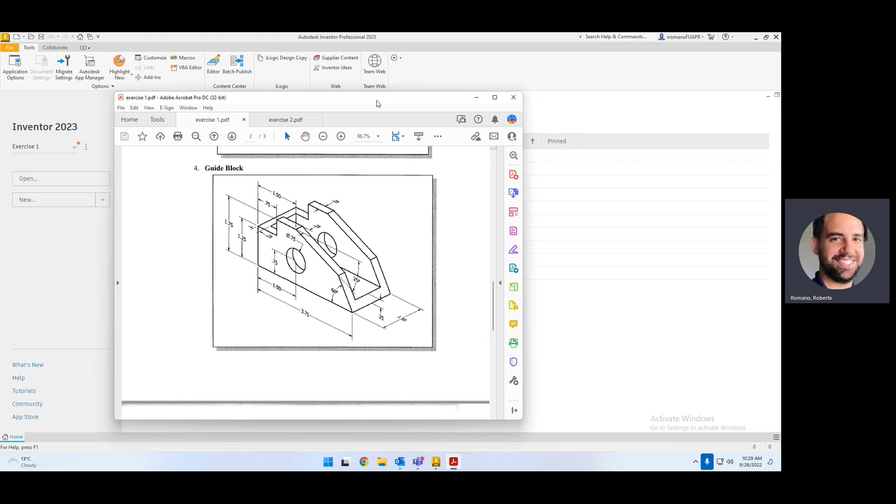So we're going to start a new file again in the same folder as before, create a new file, and make sure we're in the same unit. The unit should still be inches.

All right, start sketching—you can sketch how you want. I'm going to sketch it from, actually, we'll do the bottom plate first and then move upwards. So we're going to make a sketch. This time, instead of going from the XY, I'm going to start from the XZ view, so I have the top one.

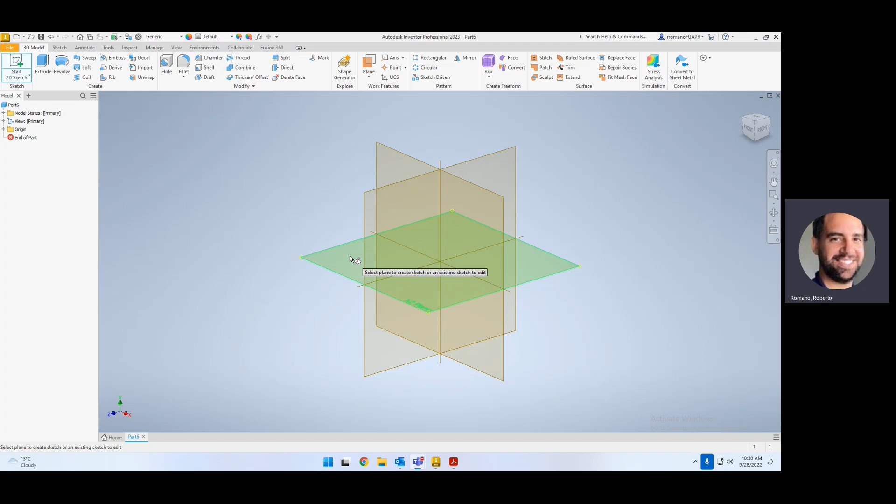I'm going to start off by making a rectangle. There are different options when making a rectangle: the 2-point, the 3-point, the center location, the center 2-point, the slots, and so forth. So what I'm going to use is the center one.

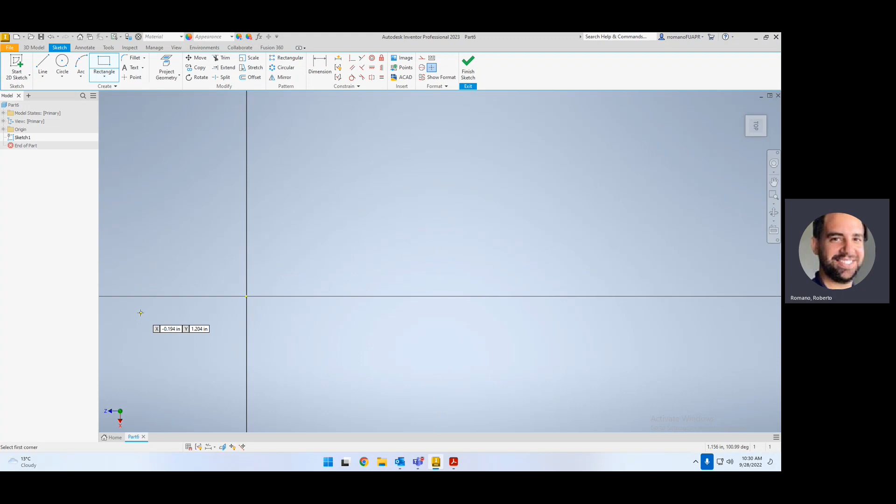This way I lock it in the origin. Or I could have—no, I won't do the center one. Let's do the basic 2-point one, and I'm going to go from this corner all the way to the next, just clicking and dragging my mouse.

Now looking at the PDF I gave you guys, it would be, for example, 1.5 by 3.75. This would give us the base for our piece. Just looking at this again, we do see we have the 1.5 and the 3.75.

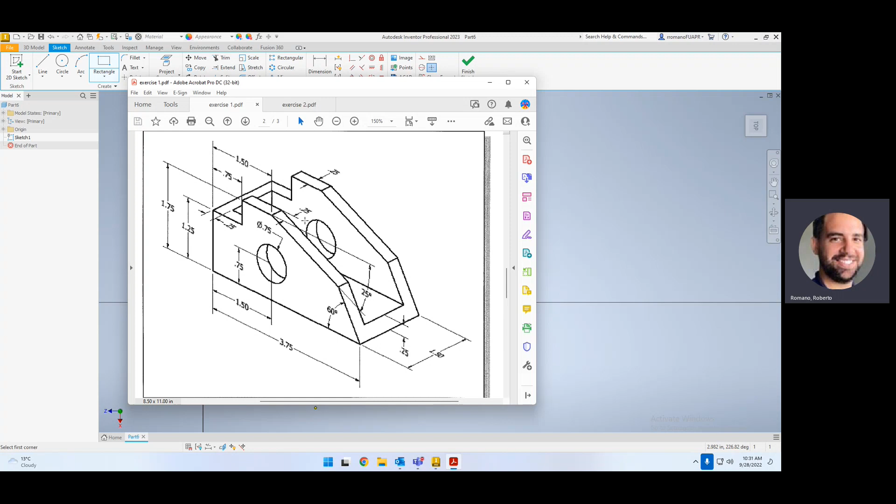Just take note that when you're looking at drawings like this, when they show dimensions in different planes, it means this one here would be the front view dimensions, and this would be the top view dimensions. If there's another view at the bottom, you'll have a different orientation as well. So just keep note of that.

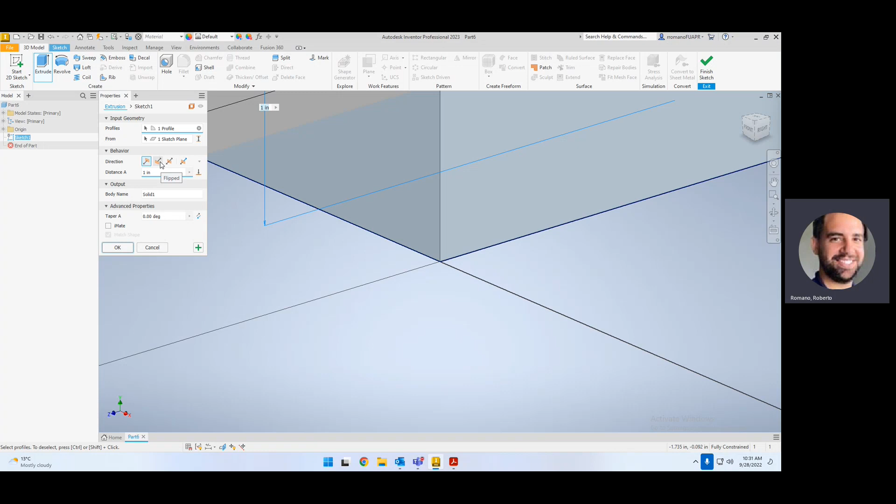So we have our first piece. Should I extrude it? Yes, we're going to extrude it. How much? 0.25. So I'm going to go to the 3D model, hit extrude, and go upward—actually, no, I'm going to go downward. Doesn't really make a difference up or down for this case. I'll type in 0.25, which gives us that thickness of the piece.

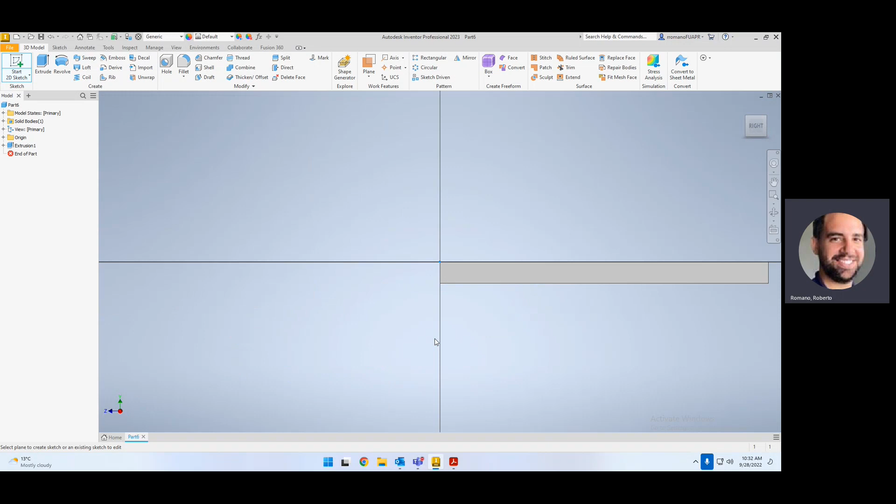Now we're going to start sketching from the side plane, so we'll do a sketch. You could have done the side sketch or the top—doesn't really make a difference. But if we want to sketch on this face here, we hit 2D sketch again, and this time I could open up the original origins, or click on the face I want to draw on. So I'll draw on this face, and it's going to properly align it for me.

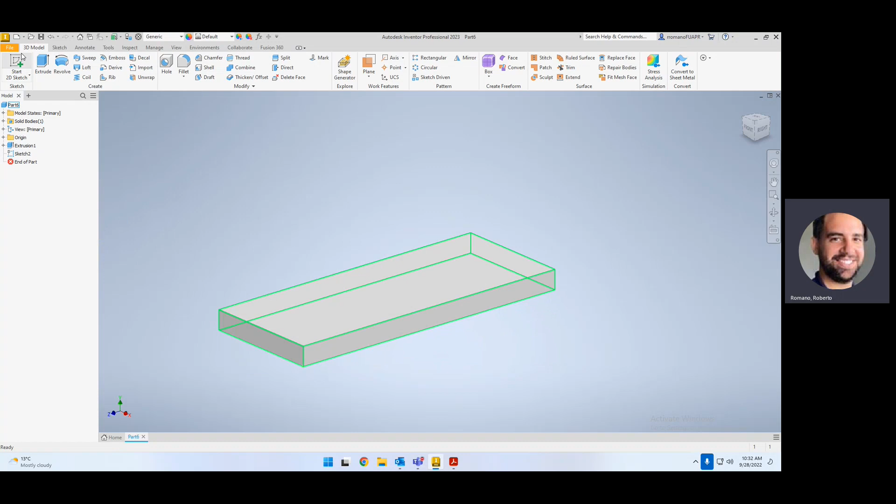If I wanted the point to be on the opposite side, so I have the origin in the corner, how can I fix that? Go back to the sketch, go back to edit extrusion, edit the feature by right clicking, and flip the direction so it goes up. So now if I do a sketch, edit sketch, you see I have the point going here. Why does it make a difference to me? It really doesn't—it's just that I have this point at the origin.

So when I cut the 60 degree angle, I'll have that nice clean result. Now I can start sketching my drawing. Did I really need to do the base first? No, but I wanted to show you that you guys can draw off that. So I could technically just go again from here—I already have the 3.75. Now I'm going to do the angle.

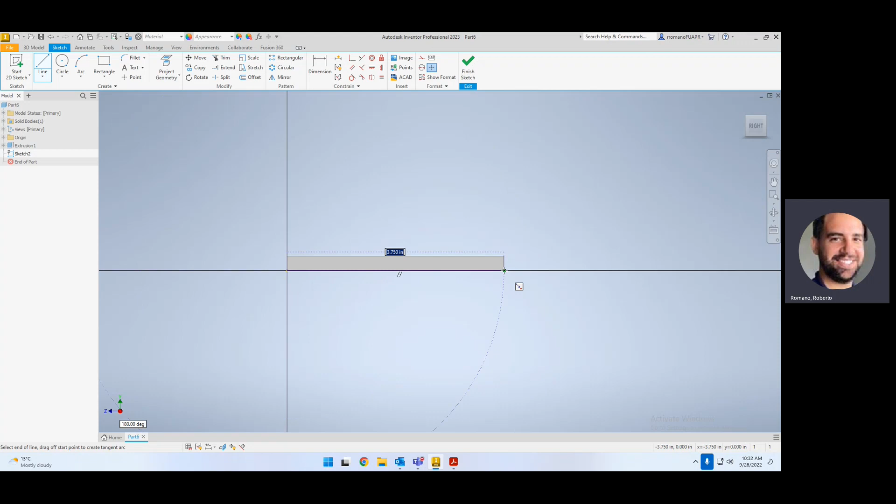So I know the angle is going to be at 60 degrees. For now, I'm going to go the opposite way first before starting the angle. Go from here, we go up—we see that it's 1.25. Go across 0.75, then we're going to go up again.

So it doesn't really give us 0.25. So if I don't want to put the dimension, what I'll do, like I showed you guys in the previous video, is I just draw a line, click it, go back, dimension it from this point to here, and put it back to 1.75.

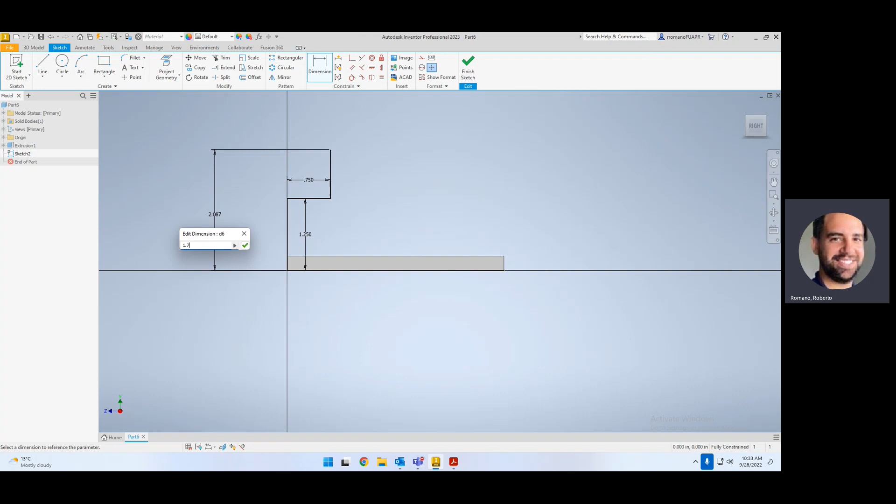Then I go across, draw another line like so, and I'll do the dimension from this point to this edge here of a total of 1.5.

And now I'm going to go down at an angle of 25. So you've got to just make sure that when you are doing it, that you have the angle you're working with.

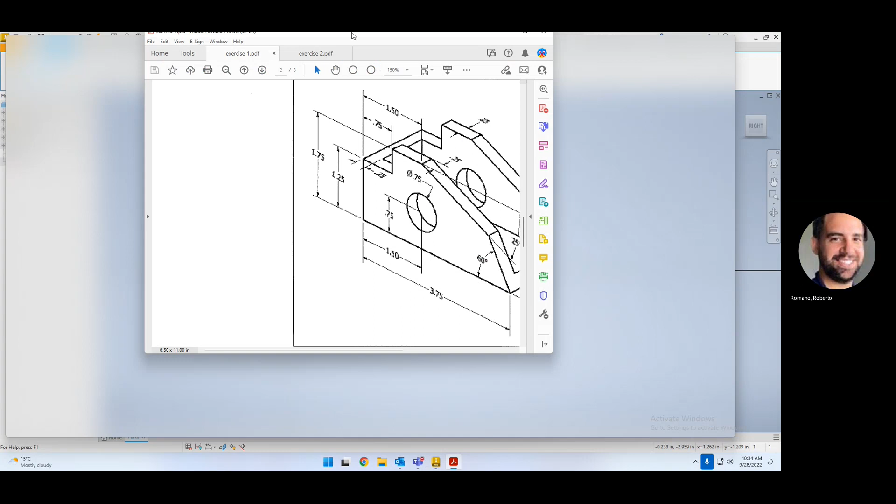So if we look at the drawing itself, we see that the angle going down is 25 degrees, and this one here is 60. So we're going to go back.

Again, if I just draw, press escape, get rid of this. So if I draw a line like so, and I click, you see that my angle is starting from 180. So if I'm going downward, it's going down. So what I would need to do is 180 minus the 60, which would give us a total of 120 angle. So I could type in tab 120.

That doesn't seem like the correct angle. So we're going to go back and just draw the line for now, and we'll go back to adjust it. So we go from here, and then there's another angle cutting through here. So now we have the shape.

Again, I didn't have to do this base. I did it just to show you could build off sketches. But we have the shape that we need.

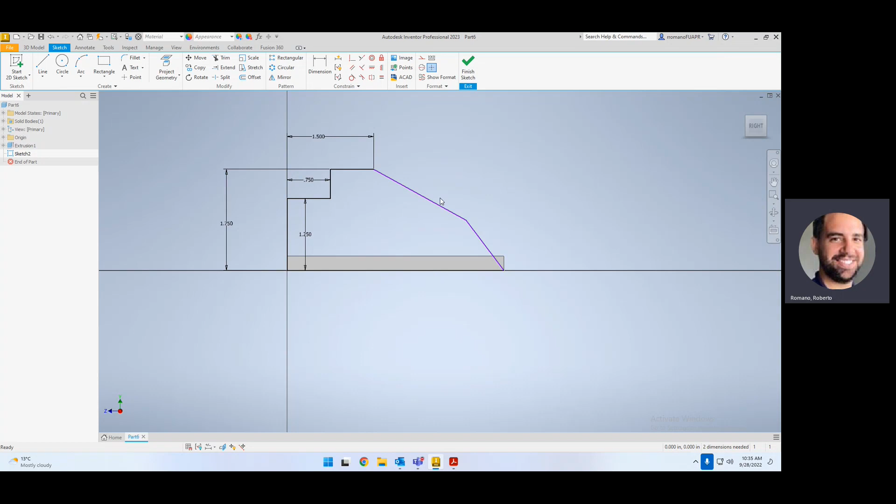What we can do now is start dimensioning to get the correct angle. So we know that the angle from here to here should be 60. We have that angle. And we know that the angle from this location to this, oops, not to that point—

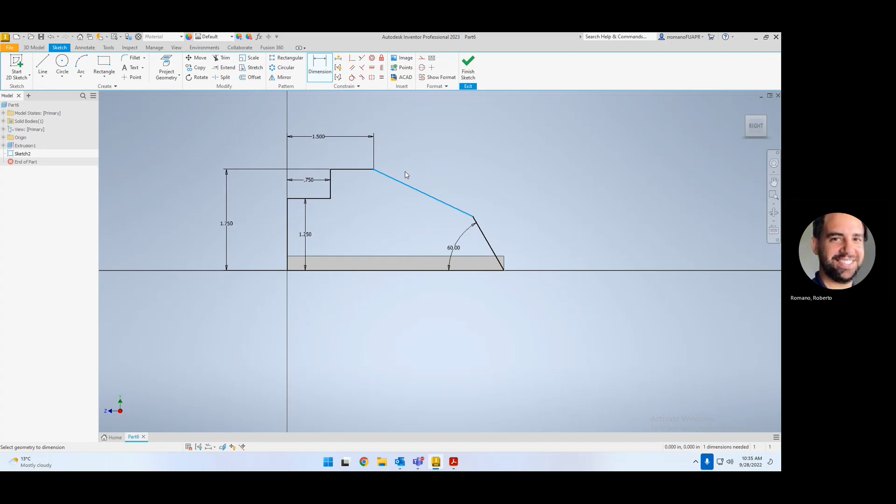from this location to this, come on, should be 25. Oh, that was pretty close. 25. And like that, we have our angle set up.

So what I just did is I drew a line, because these are the two dimensions that they give you just with the angle. They don't give us the length, so we don't need to have it. We have the angles, which is sufficient for us to do it.

Now that we have this profile, you see that I could cut this piece here. Did I need to start from the first sketch? No. The reason I did it, so we have the box, so you can show it. I should have not done it from the first one.

So what I'll do, and again, it's just educational anyway, is I will go back just to show you, and I will get rid of this guy here. And he's going to complain. So to get rid of the complaint that's going to happen, what I need to do is move this sketch here to a new plane.

So if I were to right click, you'll see I do have an option to redefine the plane that I'm working with. So I'm going to hit redefine. And what that does is it allows me to open up the origin, and I could choose a new plane where this drawing will move to.

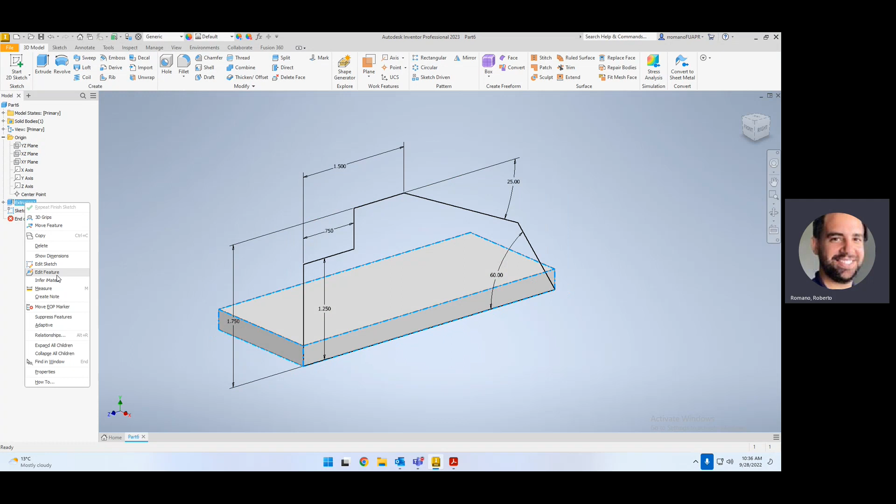What that does now, if I were to go delete this—the purple, I want to keep the purple. That's okay. Now I have my sketch. It should not affect anything because I did make it on its own plane.

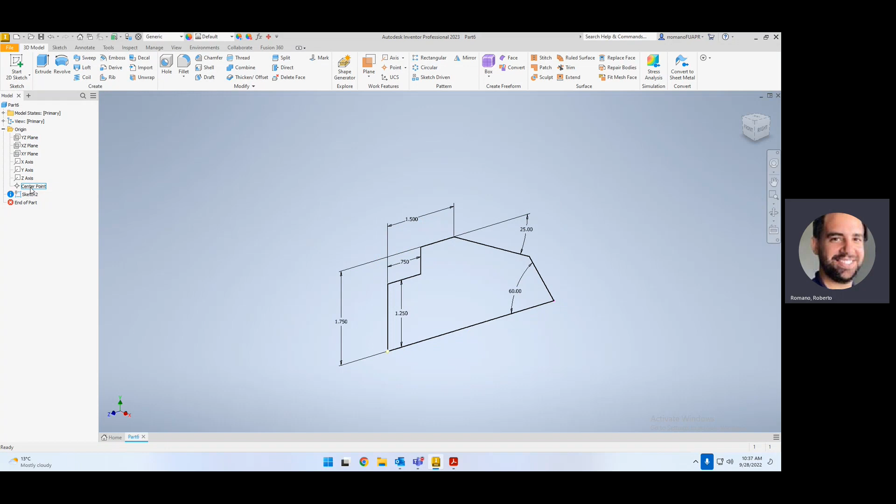Why is there an error here? Let's go check. Redefine again. You should be able to redefine on this one. What is my error? Let's go check the errors. Constraints. Okay, that's fine. Next.

So what it's saying is it's complaining about this one line here that I did earlier. If I just erase it and re-add a line.

So what happened is now everything turned purple. So what does that mean? If I were to go move the drawing, let's go move it. Oh, it's locked. So what's missing here?

Oh, I'm missing my angle I got rid of. Okay, so let's go back and draw the line again like we had before, from here to here. There we go. And all we're missing is our dimension of 60 from here to here.

And we are missing our center point. So how do we get back a center point? It's quite simple. You're going to go now to project geometry right here, and you're going to check the button that says project geometry right over here.

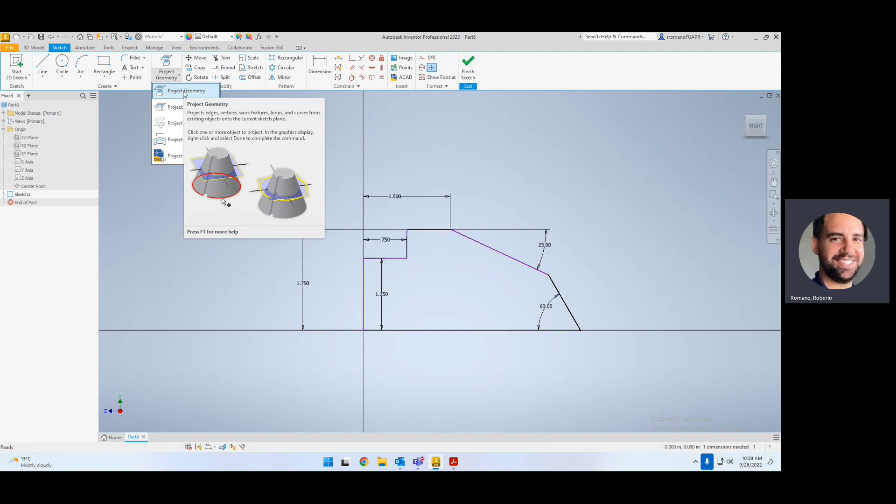I'm going to—no, not this one, sorry. Where is it? Is it under 3D model again? So it's under 3D model, sorry. And then you, hold on, let me just see something. Something went wrong here. Finish. Something went wrong. Let me go back here.

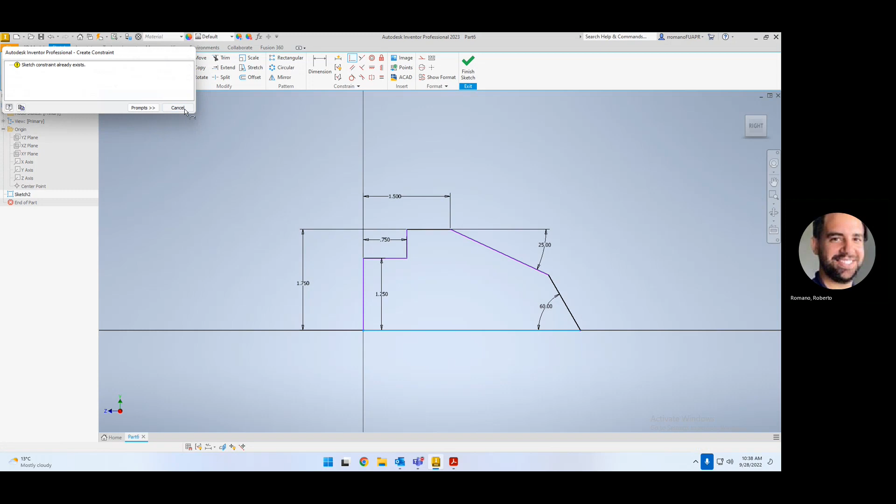Where is my point? Did I get rid of the point? Yeah, I got rid of—no, it's right there. So let's just see if I were to click this and this. Let's see what's wrong with it. Why is it stuck? Let's see if I can move this.

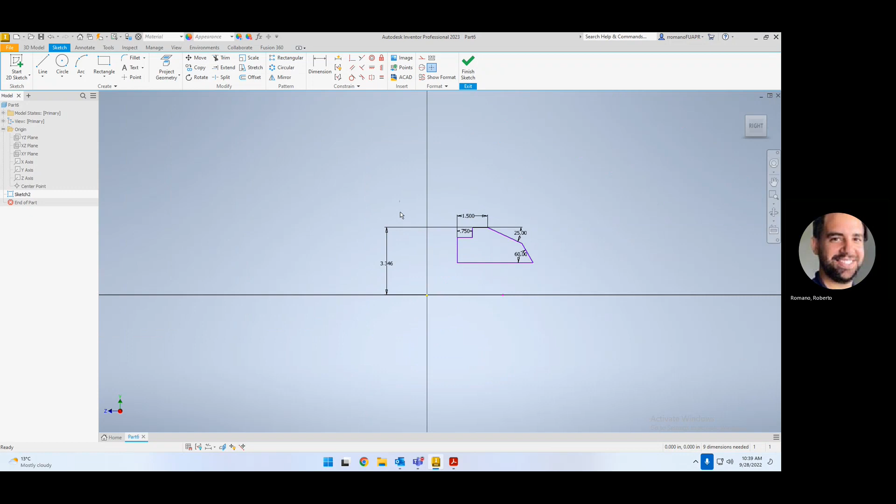So we're going to move this like this out of the way. I'm going to get rid of this dimension here for now. Get rid of this dimension. And so now we have our drawing. So there's this point here. See, there's a little dot that was in the way. That's where our issue was happening.

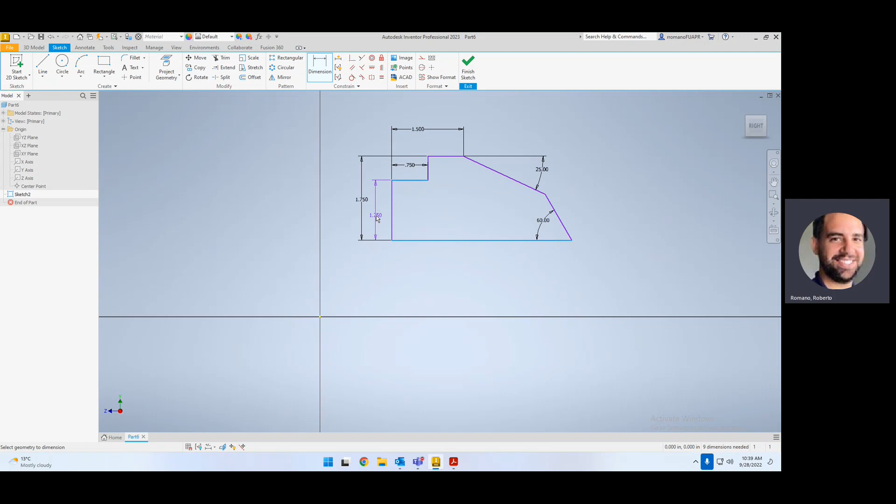Now, by getting rid of that dot, let's go add the missing dimensions before I do that. From here to here should be 1.75. So 1.75, there we go. No, I'm missing this one as well. From here to here, 1.25, that's correct. I have the 0.75, I have the 1.5.

The circle for now, we're going to add in a second. And I'm just missing my overall 3.75. I have my angle, I have my other angle. All I'm missing is, again, to lock this to the center. I'm going to use this constraint right over here and go to the origin and click on the point right over here. And it's going to fully constrain. So again, this is our goal for these assignments, is to make them fully constrained. Again, at the bottom right corner, it tells you.

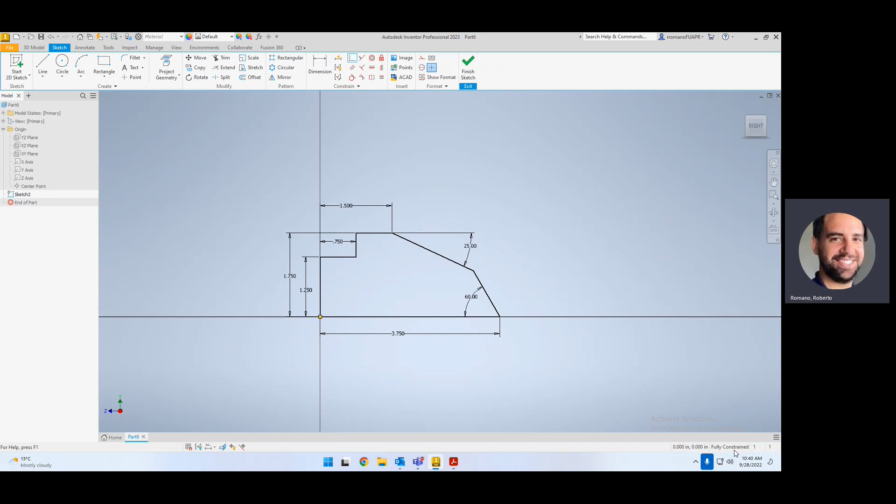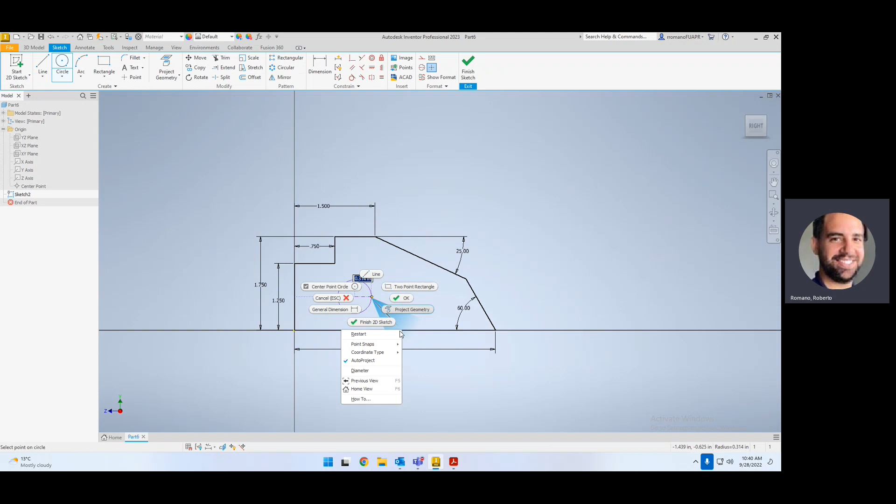Now that I have it fully constrained, all I'm missing is the circle, which I could add at the end, or I could add it now. I might as well add it now since it's here. Center circle. It is a diameter, so I click anywhere for now. If it's a radius, I choose radius. If it's diameter, I choose diameter. So it's been keeping the last one I set it to. So if I put 0.75, I do have my diameter now. All I'm missing is the placement of it.

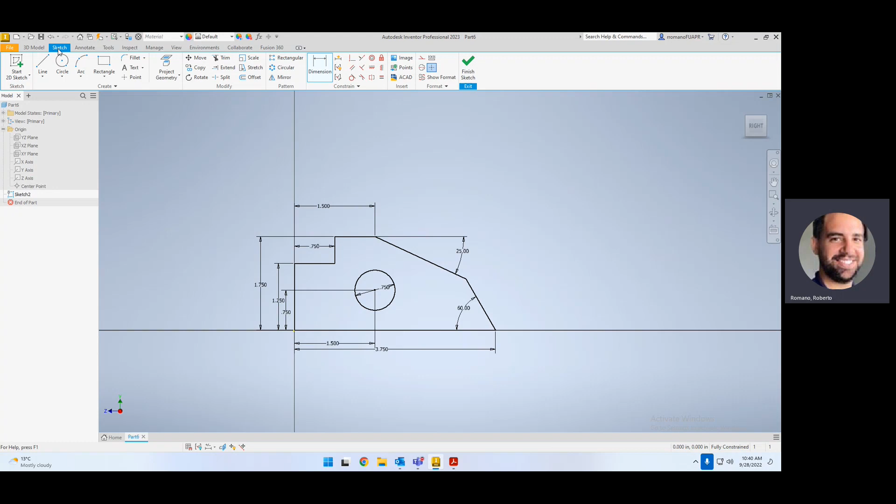So I could place it from here to here, should be 1.5. And from here to here should be 0.75. And now again, it's fully constrained. We're going to finish the sketch and hit the extrude button. And this time I'm going to go the opposite direction. I want it to grow outward.

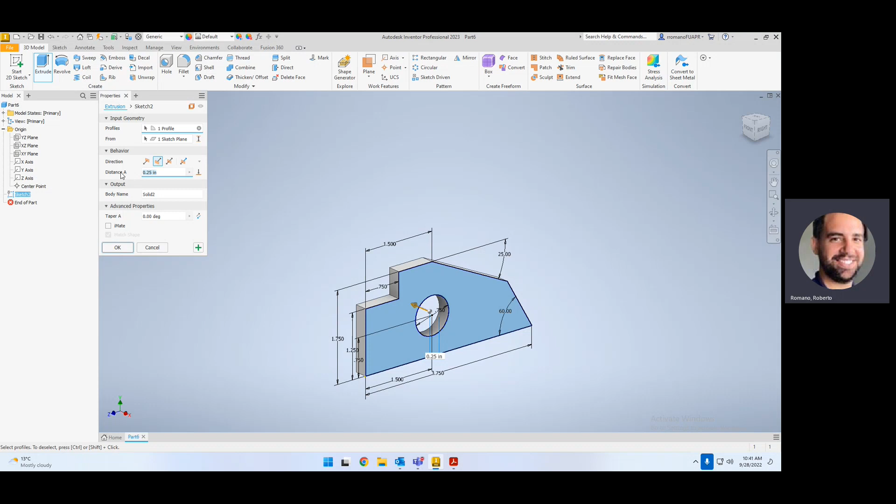So I am trying to draw this profile here. So we drew this wall here and I'm going backwards. We see that the thickness is 0.25, which is perfect. And I have the perfect piece here. Now, when modeling this, I need to have another one on the other side as well. So I do see I have it set to 1.5, so I can mirror it at the end.

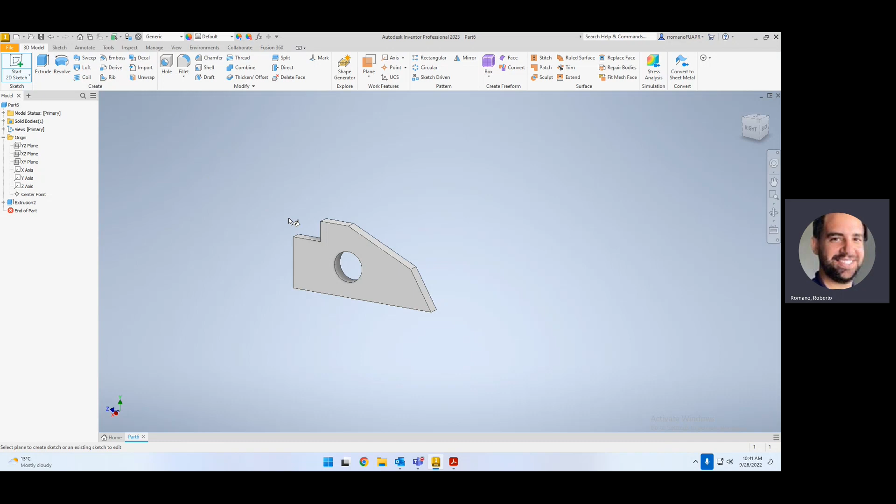But what I will do now is we'll do the back piece. Again, any method you find correct, you can do. I'm just going to draw it this way here. Let's go and do a new sketch. I'm going to sketch it from this top plane here. And I'm going to start drawing my shape that I need. So from here, I'm going to go upward. I see that the distance is 1.5 total.

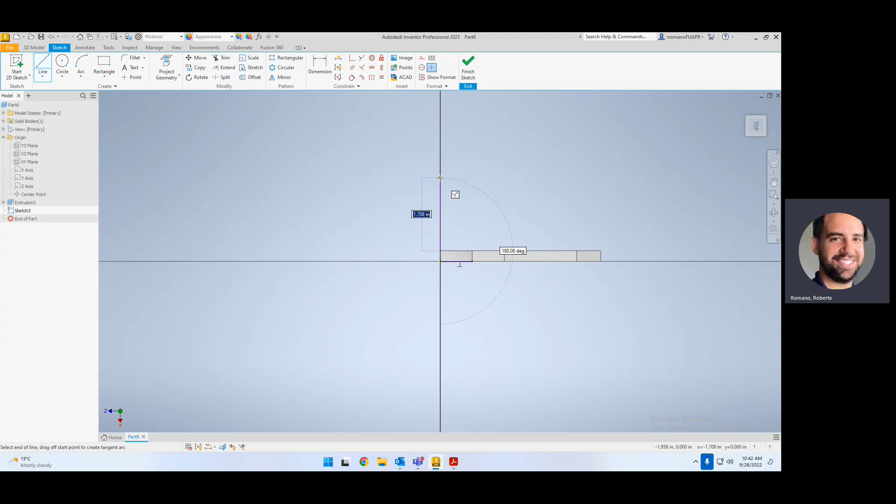But I do have to always remember that I have the two pieces that I made. So this is 0.25, and the other side will also have 0.25. So 0.25 plus 0.25 gives you 0.50. So our length would actually be 1. Oops. Could have also done a rectangle here, actually. Makes it easier. So from here, our thickness is going to be 1. Oh, 0.1, sorry.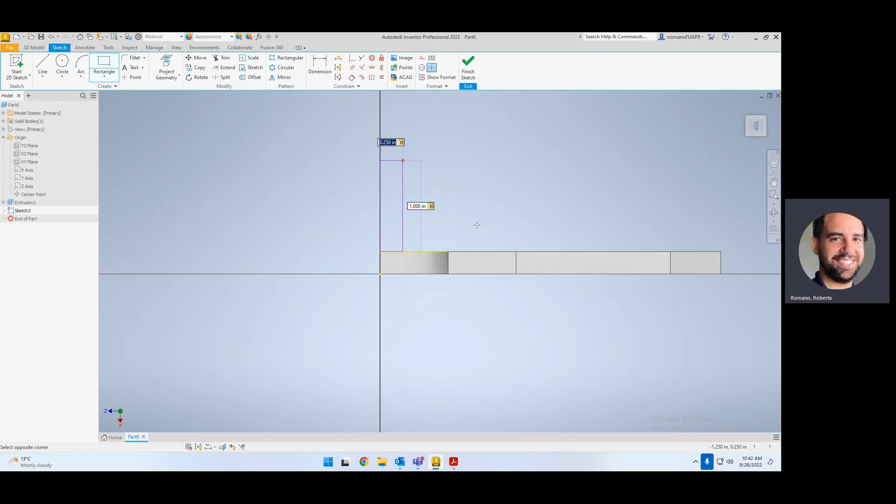No, our thickness is 0.25, and our length is going to be 1. That makes more sense. So we have that nice length here. We have the other piece, and then we're going to put the other one on the other side. I press OK, fully constrained already. Now I'm going to go back to this view here. I could extrude it downward by flipping it.

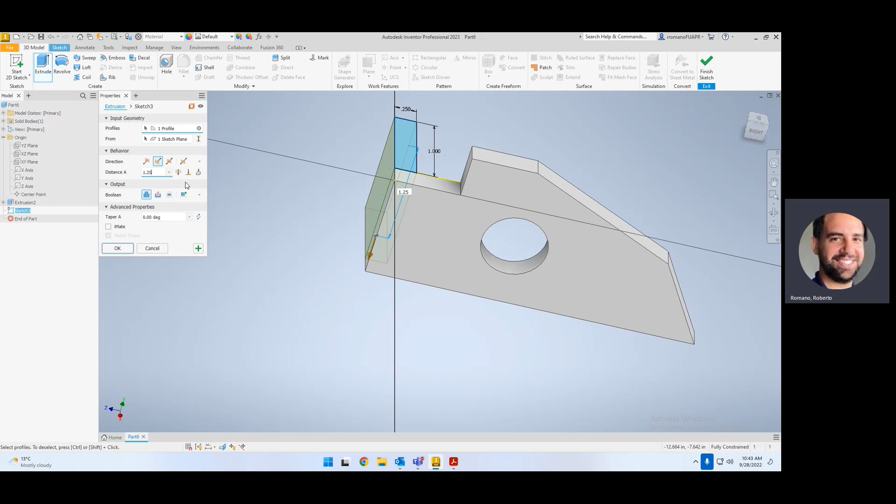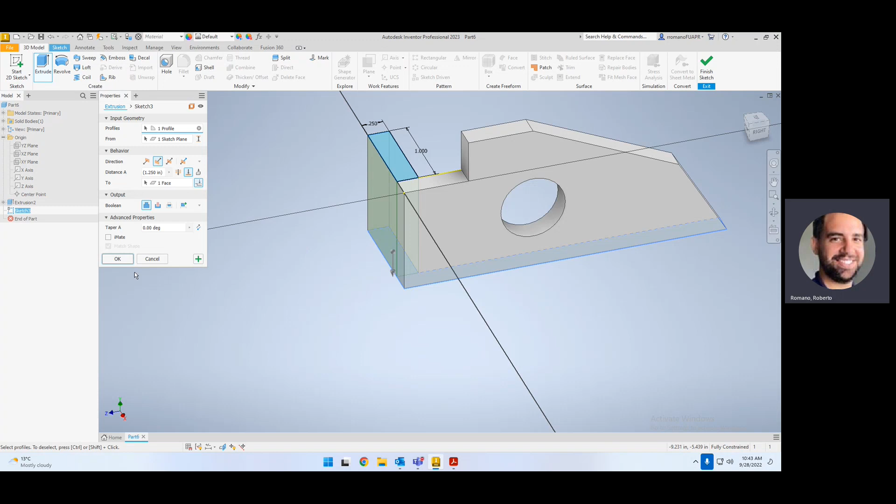I could also, if I don't know the actual height, I do know it's 1.25, but let's say I didn't know it, I could have also done to the surface. So I go to, and I just rotate by using Shift on my mouse, the bottom face here, and it should give me the same distance as well. What's good about doing this? Say in the future, if I change the thickness of this one, this piece will follow and grow as well because it's linked to that bottom face. OK. Now I have that bottom side.

Okay, now I could go do the other one, or I could use the mirror option. So how can I mirror this to the other side? I do have an extra option here, which is to make a sketch, but we're going to use the mirror. We're going to go find where it is, which is under pattern, mirror. We're going to select the feature, which is this piece right here. We're going to use a mirror plane.

Do we have a mirror plane, or should we make one? Let's see if we have one going down the middle. No, we don't have one going down the middle, so we need to make a plane before we do this. So what we're going to do is go make a plane. That's going to be the mid plane between two objects. Well, this is going to be a little bit harder because we have this piece already done. But let's see if we offset it.

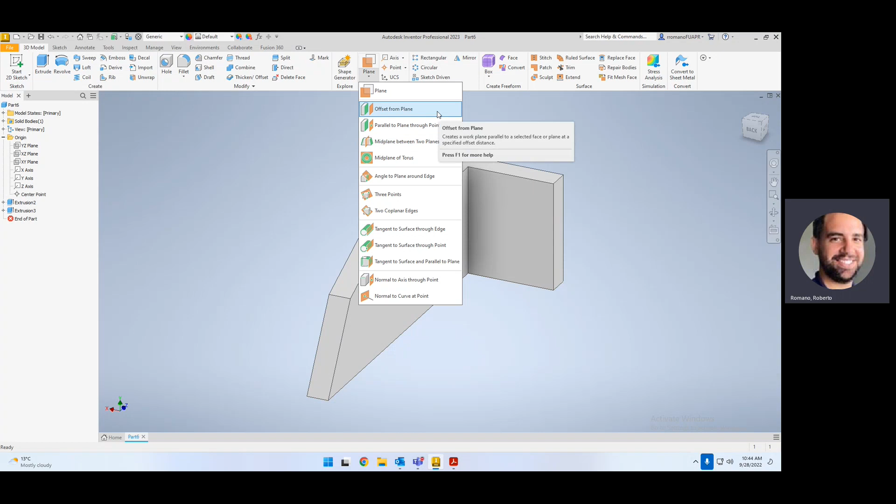Oh, we could actually offset it. It's even easier. We're going to do offset from this face here. And we know that the distance from here to here is 1. So all we need to put is 0.5. And that's going to give us the center of this drawing. Again, we made this box from here to here 1. This is going to be 0.25. This is going to be 0.25, which is going to give us a total of 1.5.

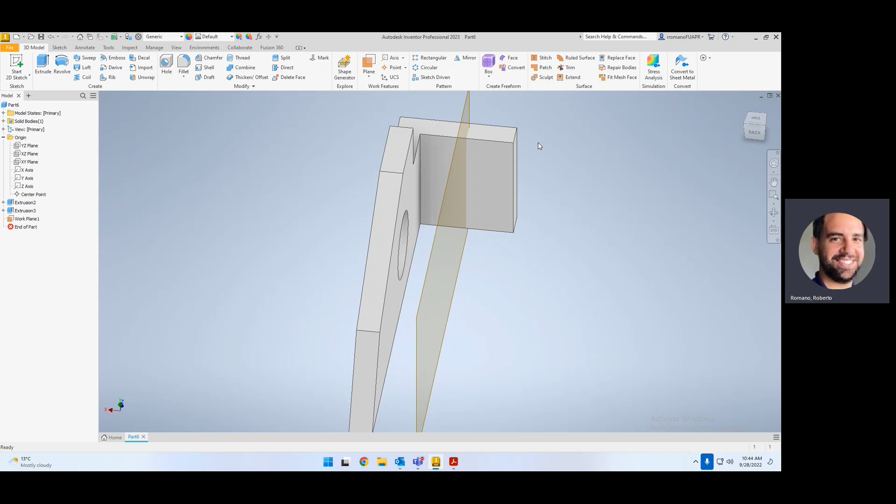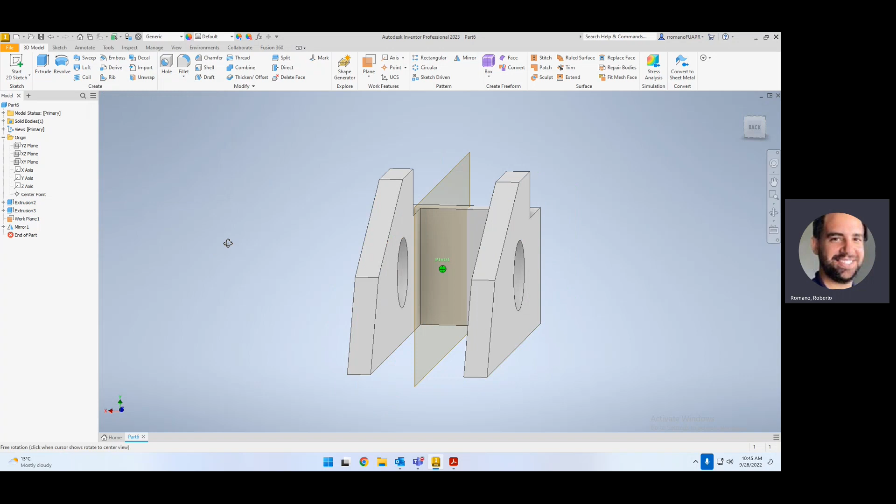Now that I added that plane by just clicking plane, offset, this face, and typed in the distance, I have a plane now. So if I use the mirror pattern, I select the feature, I select the plane, like so, and I press OK, then I'm happy with it. So now I have the plane set up as is. All I have left to do is go hide this work plane.

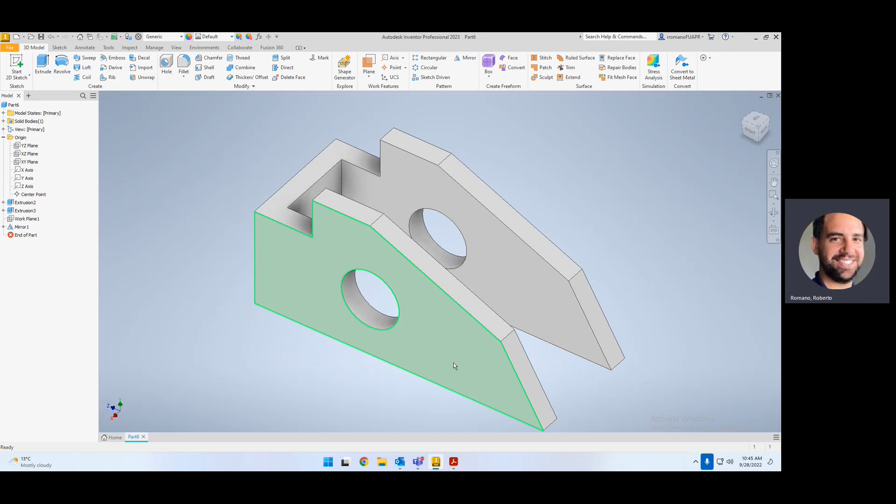Again, I feel like I built this way more complicated than I should have, because now I have to cut this out again to make the base. So this was on me, because I do need to have a base profile of 0.25 as well at the bottom. So let's go make another sketch. I kind of did extra work here, but it's fine.

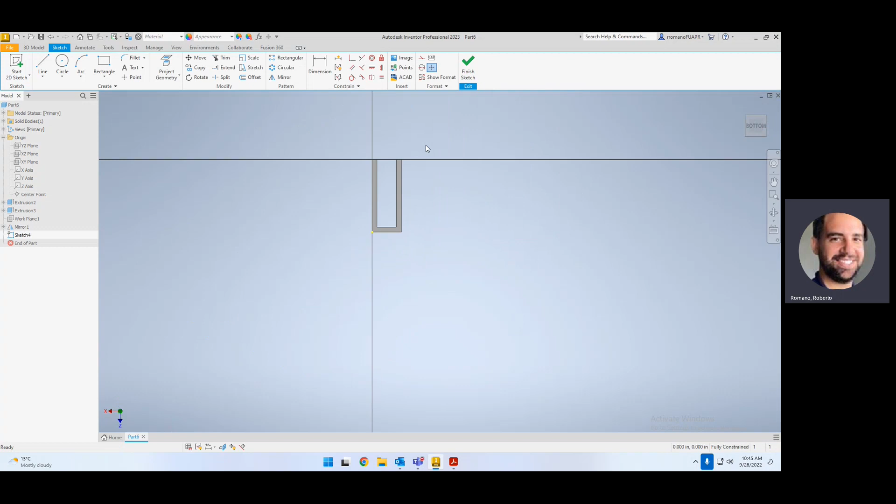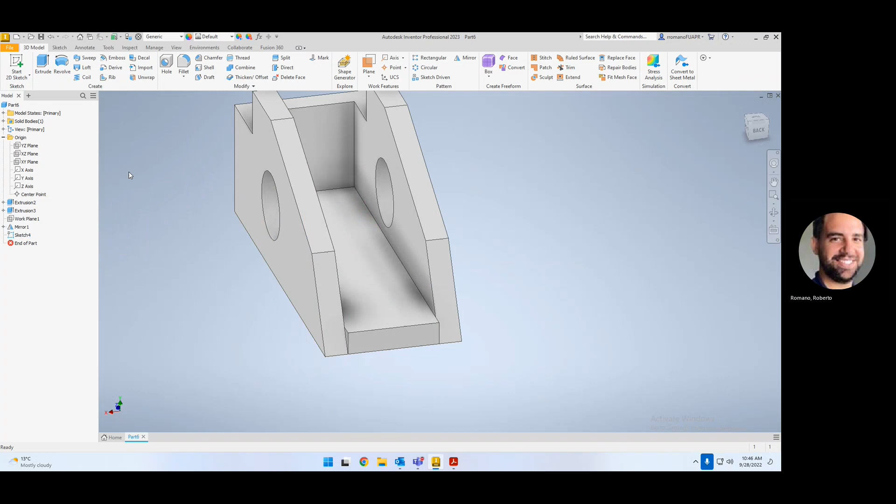From the bottom here, let's create a sketch. Let's just make this little box from here to here. Fully constrained because it's the whole box we need. Finish. Now I can just extrude it upward 0.25. And now I have to do an extra step because I decided to cut this in the beginning, but it's not that hard. A sketch.

I'll click this profile here. And I'm pretty much going to project these lines to get the trim. Project. Click on this little triangle like that. Now I think I should be able to extrude. There we go. Flip it the other direction. Because I flipped it and it's going into it, it knows that it's going to subtract. Or if not, I just make sure I click the cut.

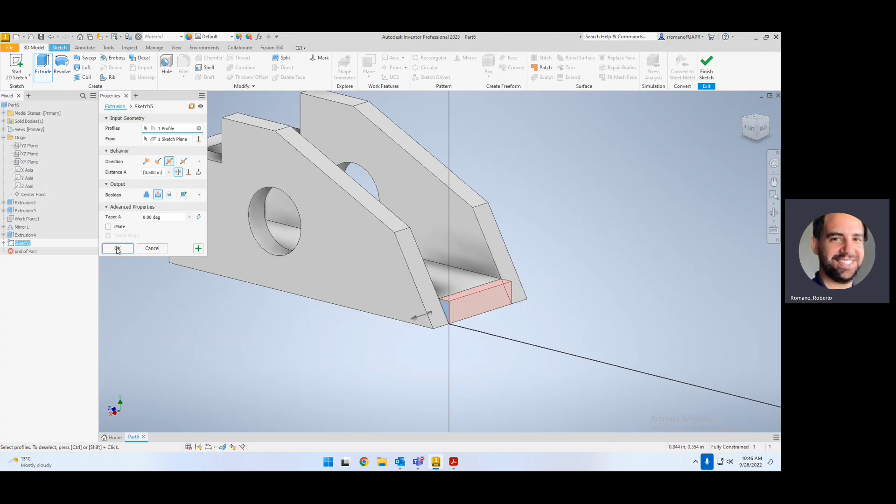And I could do through all, so it cuts constantly. Press OK. I can even do through all both directions to make sure that whenever I change the profile, it's going to cut that as well. And then I have the piece. Every one we did was fully constrained, which is what I want you guys to do.

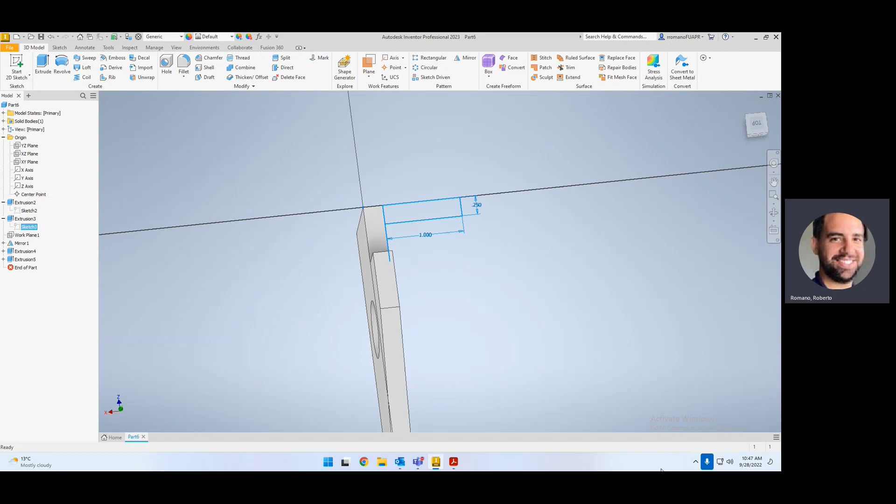If you ever want to go back to check if it is fully constrained, right click, edit sketch. You see here, fully constrained, finish sketch. I could also do the little plus sign, then right click, edit sketch. You see, fully defined. Now this one doesn't make a difference. Go to this extrusion, edit sketch. Fully defined. Sketch. I think this one I didn't do fully because I just copied it. See, edit sketch. Fully defined.

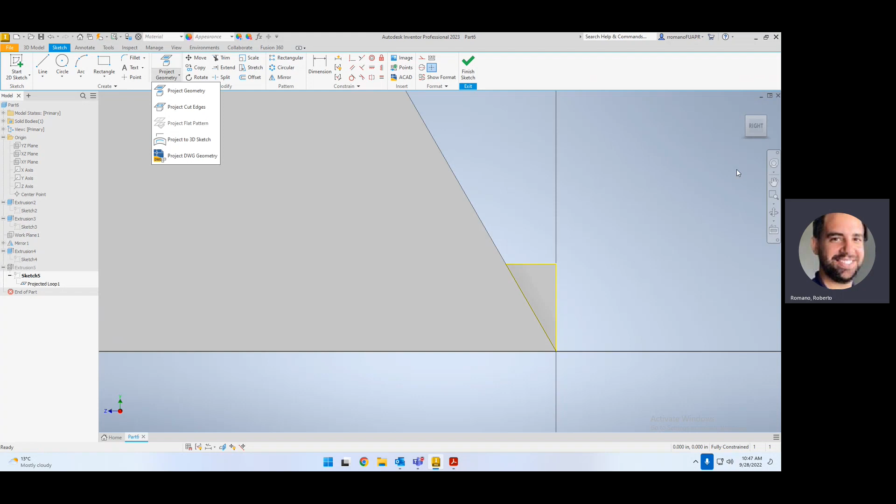And again, how did I get this profile so fast? It's as simple as just going to your sketch, project over here, and just click the first one, click on the triangle, and it's going to give you those yellow lines. And then after that, I was able to just do extrude as a simple cutout.

Again, I did quite a lot more extra steps than needed. I could have just first built a box and subtracted stuff. I could have done the base and then minus the 0.5 from here and went backwards. Whichever you find suitable. As long as your end results are the same, it's fine. Now that we have it, we checked our dimensions, and I would like you guys to do this as well: always make sure to save it. That's important. And this one here was called guide block.

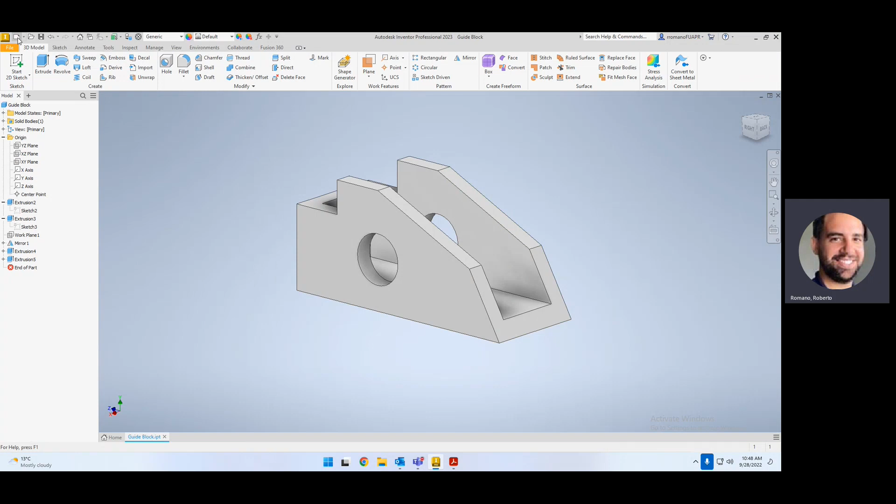Like so. Let's save. Now we're going to go new. Click on the new actually, just in case we're not in the right one, and just do drawing. Again, this is DWG, but they give you the same results. I'll do the IDW. Create. We're going to worry about the sheet sizes later. All I want to do is just put it on a sheet.

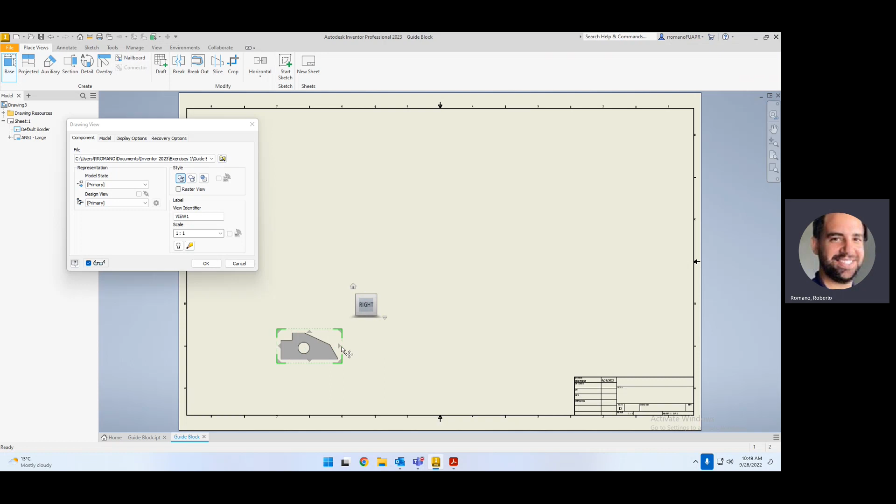Because it is open already, it does have it already set for you. What's nice about this as well is, say, for example, I don't like the view that it's currently showing, I could change the view by clicking on the view cube before accepting it to be my front view. I could change the scale. Again, the scale is big because this is a pretty big sheet. So we have it. I could also start clicking to see the other views I have.

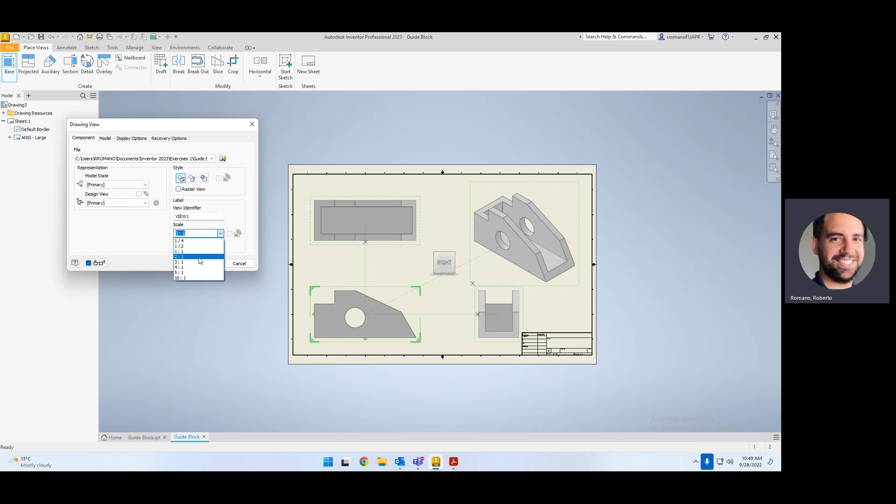Like so. Pretty big view. Let's go 2 to 1 instead. Finish. I could go to this view here, double click on it, make sure that it's shaded so they can see it. And then we can start dimensioning. Oh, you always want to make sure that when you are dimensioning, guys, that the most dimensions are on your front view. That's how you know your front view: it's the one that has the most dimensions.

So like I showed you earlier, we can retrieve dimensions, but look what happens. I think in this one, we may have a little bit of an issue. If I go annotate, retrieve from the selected object, this one here. Actually, this is pretty clean. Sometimes you will get a lot more. This came up pretty clean again, luckily. Press apply, close it, and I can start adjusting my dimensions.

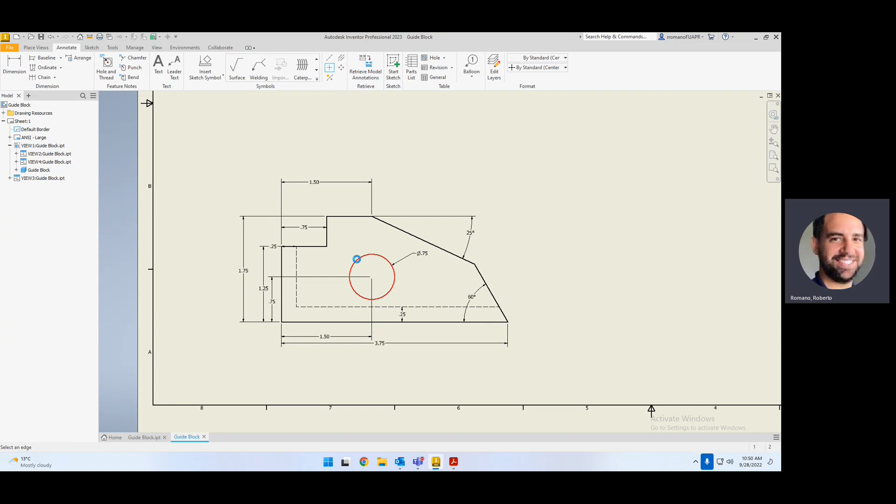If it gives you issues, like I showed you before, just erase it. Don't try to waste too much time on it. Click again, and it's going to give you a nice clean dimension. You are missing the center marks again, so add the center mark. We should have the same amount of dimensions. You do want to make it clean when you are dimensioning, not to have them overlapping, to be clear to understand how they're drawn. This, I don't know what this 0.25 is.

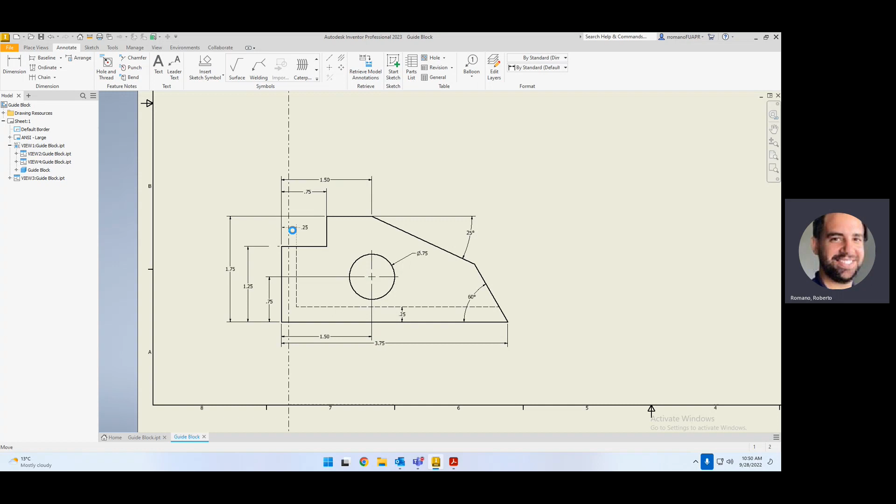Oh, this is the thickness here. Do we need to put the thickness here? We could put the thickness here, but we also have it up here, so we don't really need this dimension being on this view here. So I could get rid of that, as well as this one, because I could see it from this angle here that we're going to put the thickness. But we don't need to have it twice.

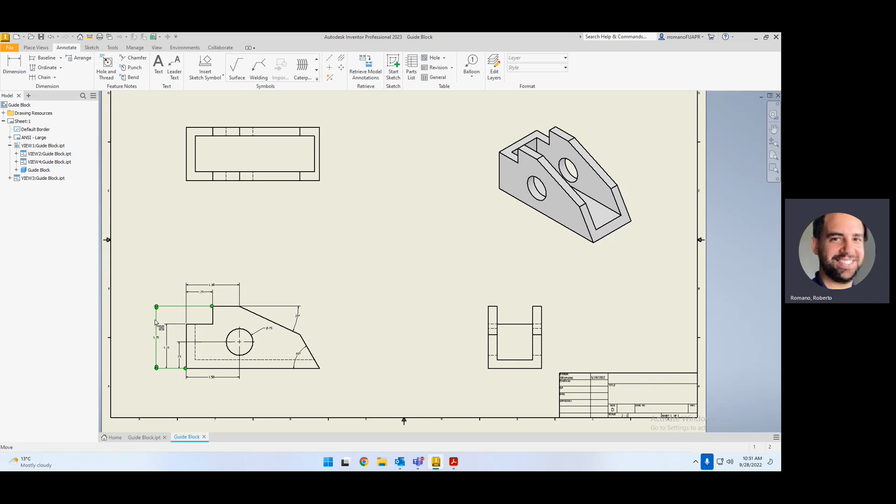Even for some dimensions, like the overall one. I know now we're trying to make it like the demo, but I don't need to have these present on this view here if I'm going to add them on, say, this view to know the overall height. So if I know I'm going to put the overall one there, I can annotate it. Because if I don't have any dimensions, then there's no point of having the view there, if there's no knowledge we're gaining from it.

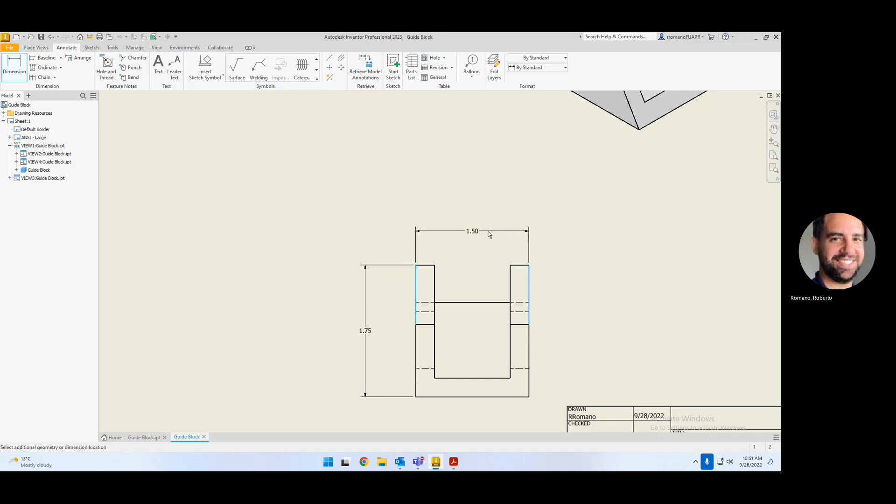I could add those 2 dimensions that I had earlier. I could also add the thickness now on this one from here to here, which is going to give me the 1.5. I could have had the thickness of each one here. I'm going to add the overall from here to here, which is the same one as there, so I don't need it twice. I have the height. I could put in the thickness here. And I could put the thickness here again.

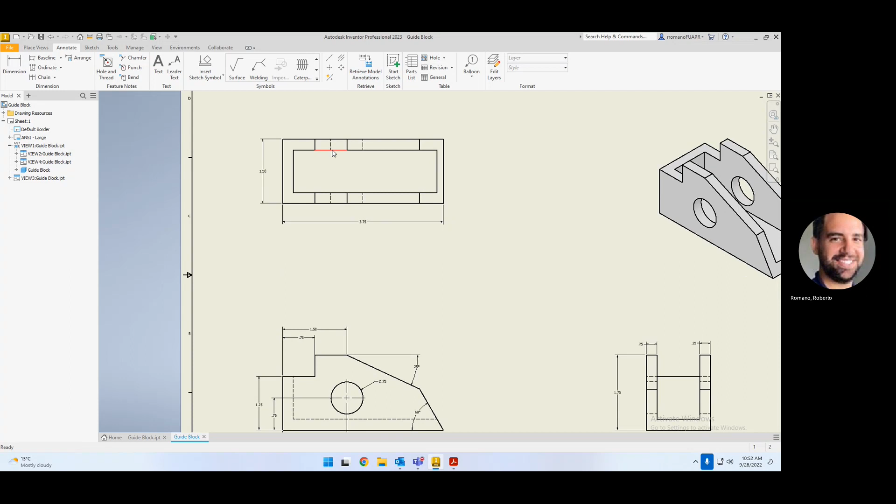So stuff like this, all right? You could add the center lines, the header lines. I just want to show you quickly that you do have it. This is an extra step for the drawings. For us, you don't really need to do the sheets. If you have time, it's good practice because we will be doing a lot of sheets later on.

Again, that's how you would make this simple one using extruded features from an object. So pretty much we started building this piece here. Then from this one here, I used the bottom plane and added another one. We added a cut feature in this drawing. We did extrude cut all through one item. We did an extrusion based off the bottom plane. So if ever we change the heights, it should automatically update as well. So that's it for the guide block.